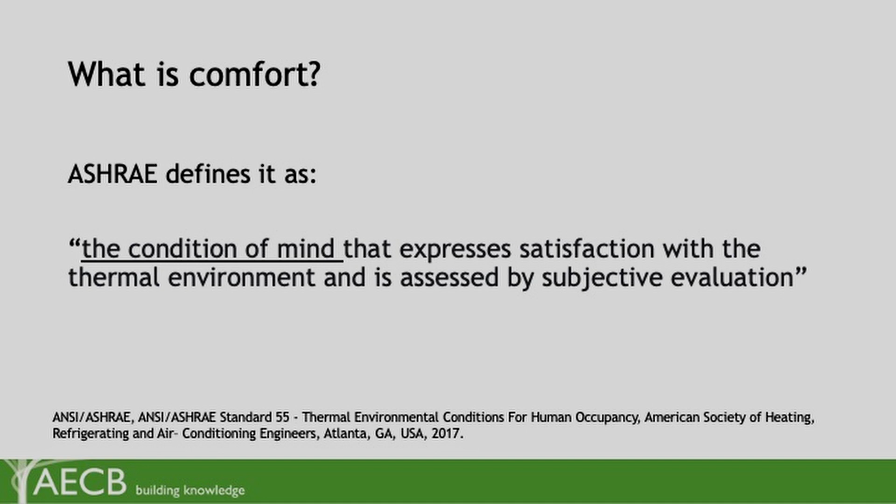So first, what is comfort? The ASHRAE states it's a condition of mind that expresses satisfaction with the thermal environment and is assessed by subjective evaluation. So the first key is a condition of mind, and that's a key part of why defining it is not as simple as people think it is. It's not a number that you can give people, this is what you're going to be comfortable with.

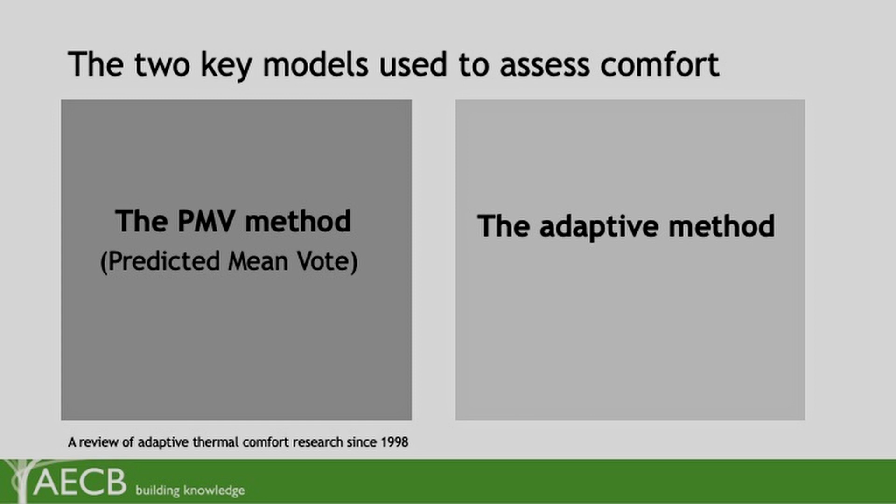There's 2 kinds of schools of thought that look at this, and they both derive into different design techniques, different ways of looking at buildings and mechanical ventilation, mechanical systems. So first is the predicted mean vote method, and then there's the adaptive method.

So the key fundamental difference between the 2 methods is the PMV sees comfort as something physical, something you can measure, something with particular parameters: heat conduction, metabolism, air speed, air temperature, humidity, and then you put it in a formula and you get a number out. They use that using climate chamber studies that were done in the 1970s.

Now, the adaptive method is a more recent method, and it's becoming a bit more adopted, and it considers the human part of it—that there is human adaptation, behavioral adaptation, physiological and psychological. I've highlighted physiological because it's a contentious point. Some people think it's entirely psychological, but no, there are physiological changes that your body makes to make you comfortable in a different temperature.

So in the PMV method, to them, comfort is a very specific range that is defined regardless of what time it is, who you are, what day it is. This is what comfort is.

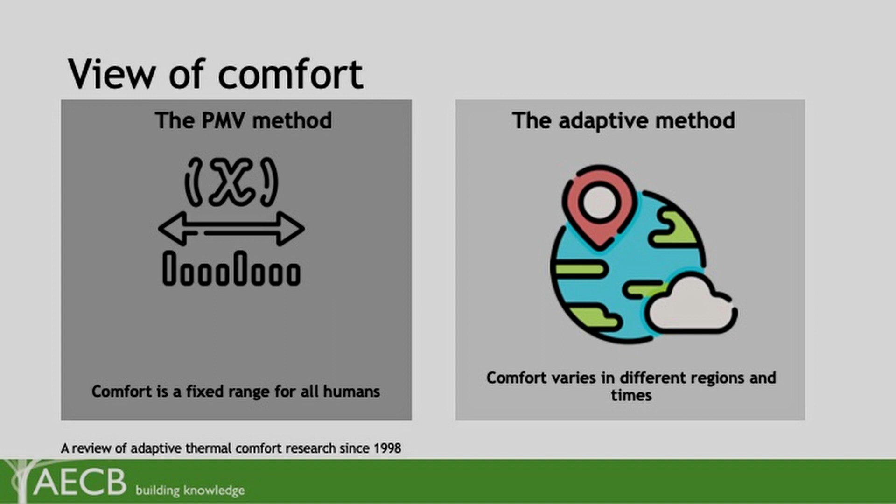With the adaptive method, it perceives comfort as something that is different based on region and time. You, as the same person, might be comfortable at a temperature in summer, but you won't be in winter at that exact same temperature. The same goes for acclimatization—someone in a hot climate will be more comfortable with hotter temperatures than someone who's used to colder climates. There's even evidence of short-term adaptation and long-term adaptation.

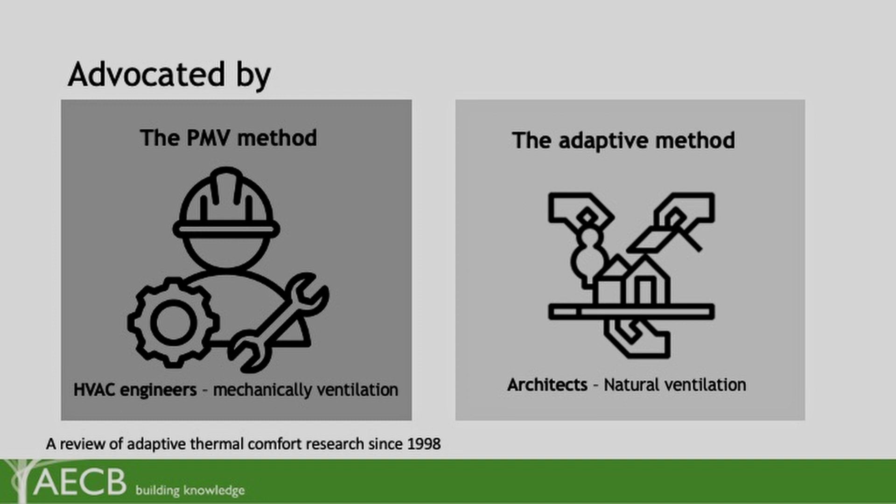So the PMV method is generally advocated by HVAC engineers. Why? Because they have a physics background. They're used to numbers. They want clear, standardized ways for designing and sizing their equipment. Whereas the adaptive method is more advocated by architects who prefer passive solutions, natural ventilation. And when you're dealing with natural ventilation, you're dealing with the elements—something that is not as consistent and stable as it is with the mechanical.

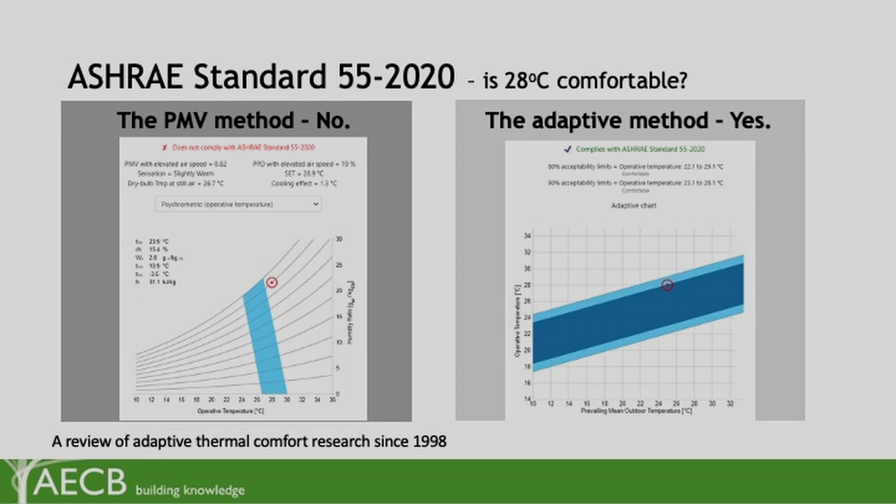So this is the ASHRAE Standard 55, and it's one of the standards that has accepted both methods as valid. I'll give you an example here: at the temperature 28, if you use the PMV method, it will tell you, using all the same parameters, that it's not comfortable. But if you use the adaptive thermal comfort model, it'll tell you yes, it's comfortable, if during that day the mean outdoor temperature was 24, 25. So this is just an example of how different the two can be, and you can see how small that range is compared to how much this range is considered comfortable.

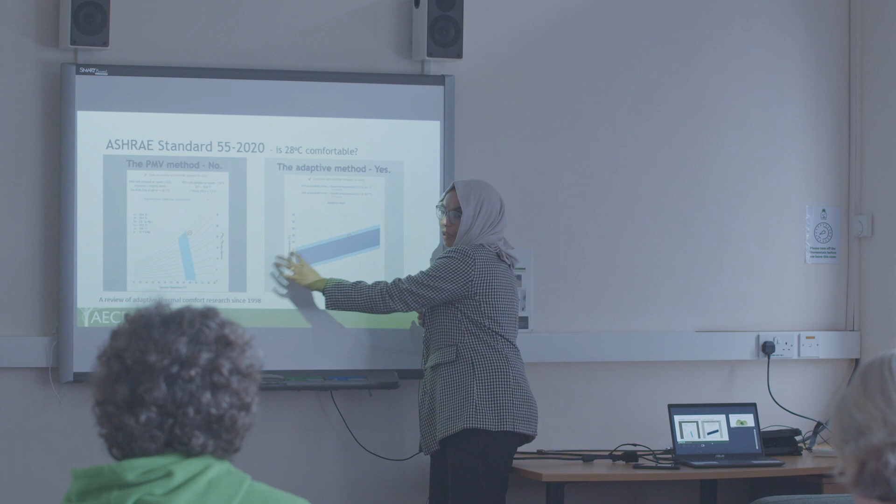So why is this important, and why is it relevant to sustainable buildings? Because you need to build habitable buildings. You can't, for example, put no heating in a building and say, oh, it's saving energy because there's no heating—you have to make them habitable. So that definition is a key part of it, and it has a huge impact.

There was a recent study about something called dynamic set points, where instead of having the same set point the entire year, you just change it based on what temperature it is outside, and it has resulted in massive savings in building energy. So it's a huge part of energy savings.

So we're going to talk a little bit about the case study.

Okay, so Kamran, I should introduce Kamran. He got us involved in this. This is your baby in a way, isn't it? Eco-village in Tanzania, a sort of permaculture-based community project.

We developed a small version of it. It didn't look anything like the final building, but it was a small test unit that took all the features we were hoping to check whether they would work or not. Basically we filled it full of data loggers, had the building used for 12 months and tried to understand did our ideas work? Our ideas were based on precedent.

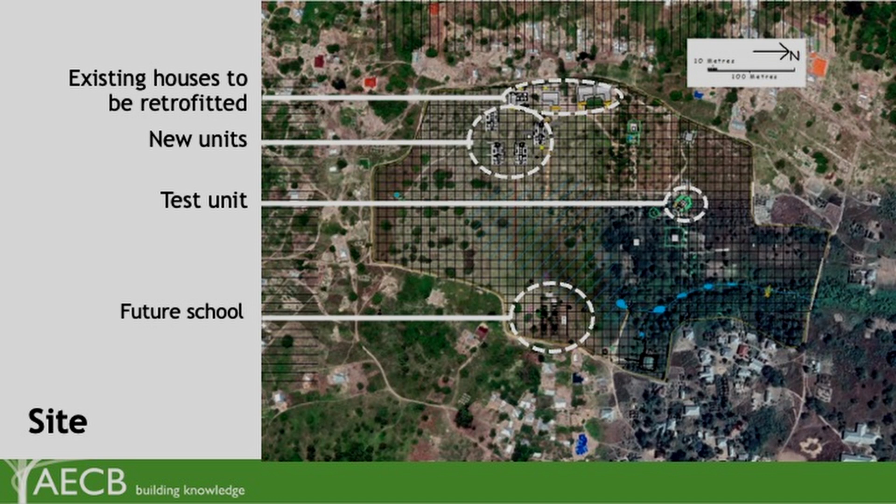It's in a rapidly urbanizing village settlement, towns, but maybe in 20, 30 years that could look very urban, maybe even sooner actually. North is that way. The village has built an eco-school here. The test unit is here. These are the existing houses, and this is where the 5 new houses are destined for. We've just now completed that one.

So back to the test unit. Next slide. And that's to you.

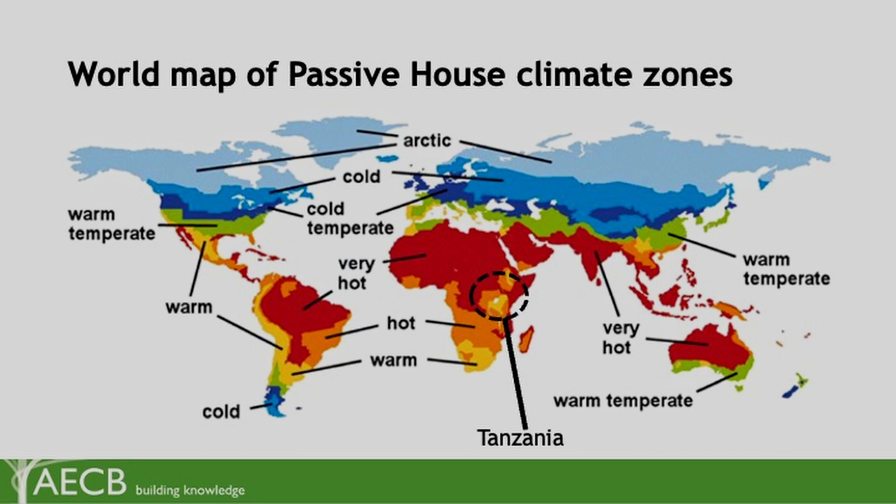In a hot climate context, these are the parameters from the PMV, the parameters that define comfort. In a hot climate, we need to focus on increasing the airspeed, and the reason that helps is it lets you sweat faster and easier. So you become more comfortable in cooling, but it doesn't do anything to the building itself.

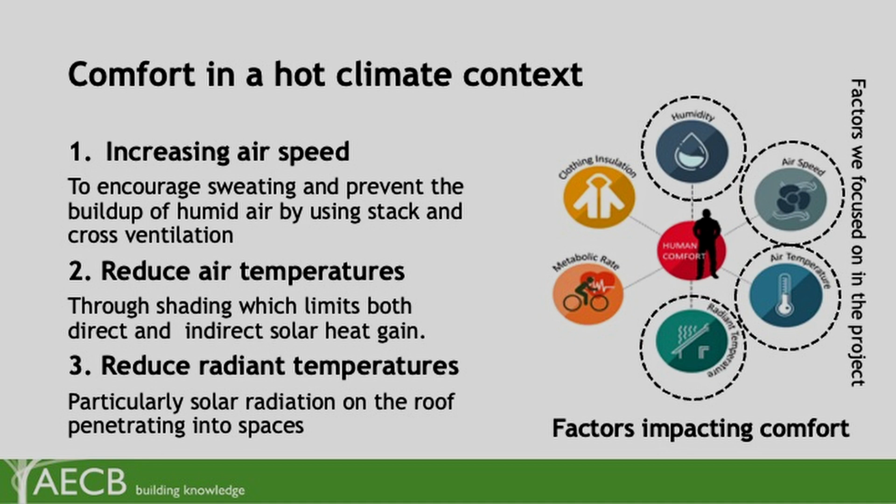Next we have humidity, which is also linked. If we can, as much as possible, let the air flow, because you don't want that humidity to build up, because the higher the humidity, the less comfortable you are at the exact same temperature.

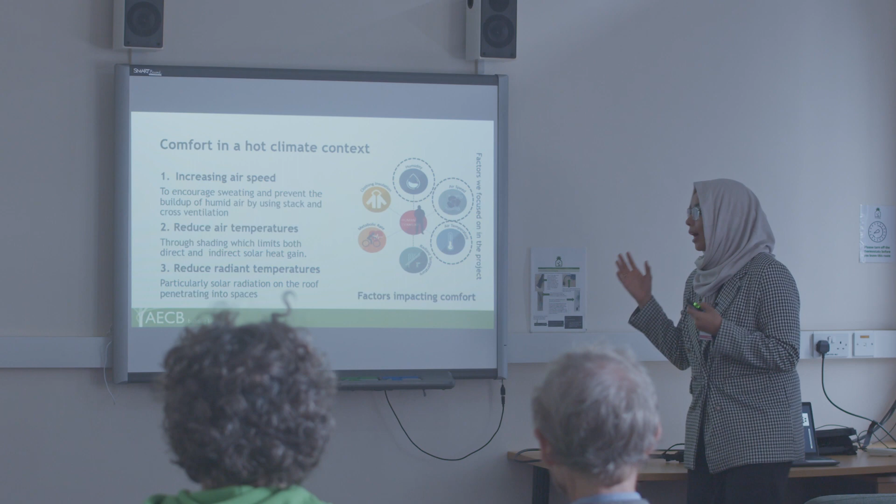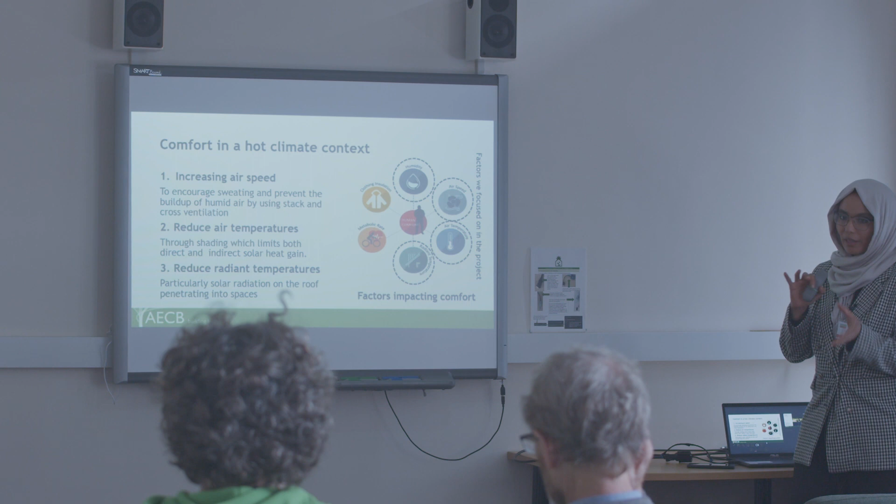We wanted to reduce the air temperatures, mainly by using shading, and we wanted to reduce the radiant temperature. The difference between air and radiant temperature is that air is what's around you, but the radiant temperature is coming directly from the sun. In this tropical environment, it hits the roof in particular, which is what our focus was.

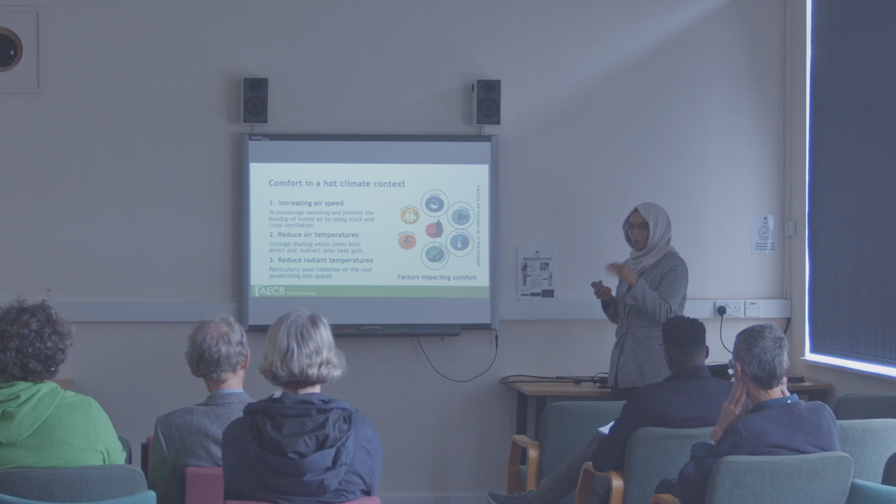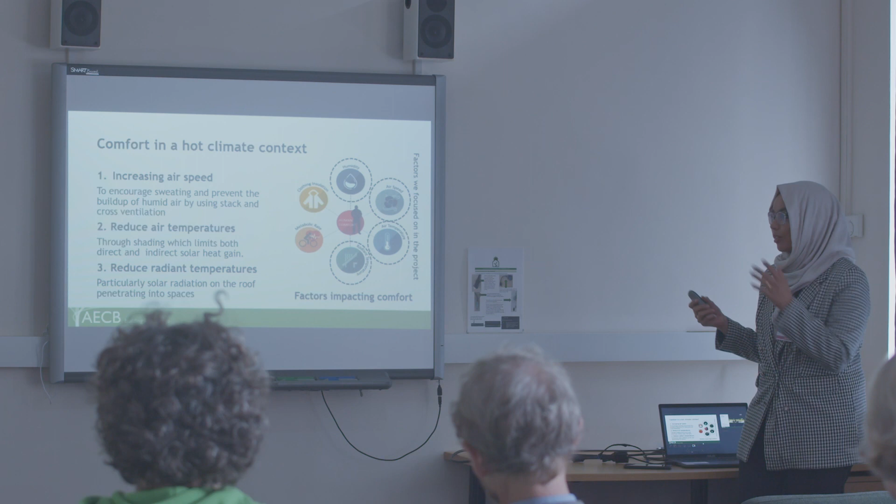You can impact the radiant temperature a lot more than the air temperature, because with radiant temperature, just shading has a huge impact. But with air temperatures it's less of an impact, and you need active cooling, or in a hot climate, evaporative cooling, to actually change the air temperature.

The original concept that me, Adele, and Alan Clarke were discussing was, what are we actually aiming for? We spent a lot of time learning about the eco-village and sitting under this cashew tree, which is the village square. Basically the conditions there were very pleasant. There was access to cooling wind, plenty of shade, and good light. We thought, well, that's actually what we're aiming for. So in a way, that was our technical brief.

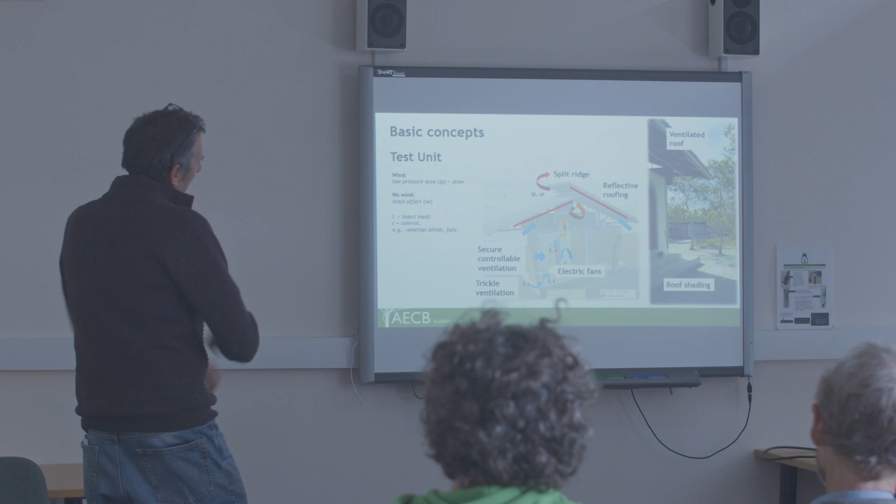Right, okay, so basic concept. The ideas we wanted to apply to the larger house, we packaged down into what we hoped would be a test unit that was also a useful building. Now that had some problems doing that. So basically there were 2 guest bedrooms and a male and female toilet, so basically it's a cube.

The key features we tested were a highly reflective roof, fully ventilated, no soffits, no gables - well, come back to that - and a split ridge. The idea being that we could allow air to move through it, and any hot air would tend to rise up through this and move upwards while fresh air came in there.

So, ventilated roof design. We were aware of the need for cross ventilation across occupants to cool their bodies, just as Huda talked about.

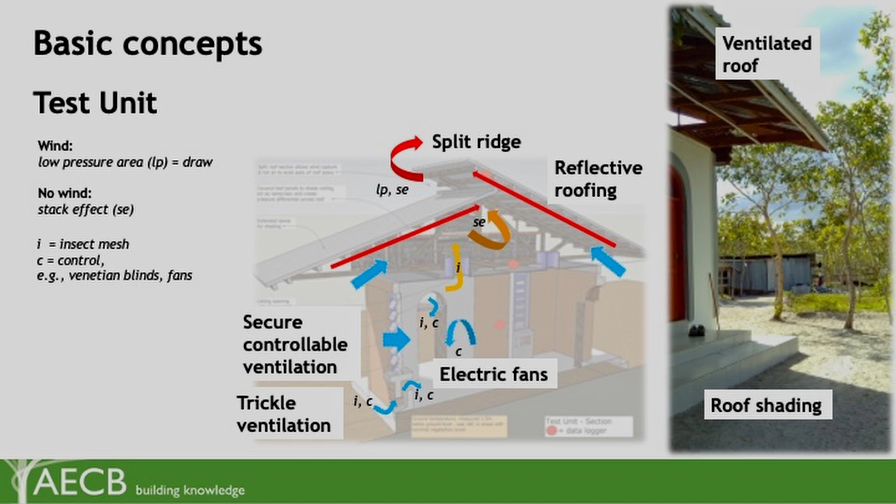So we had basically windows and doors not on opposite sides of the wall of the rooms, which would have been better to test it. So that was a slight compromise because we're trying to make it a useful building.

Everything was insect mesh protected because there's quite a lot of mosquitoes in that area. And then we relied on active cooling through fans, so ceiling fans was another key feature.

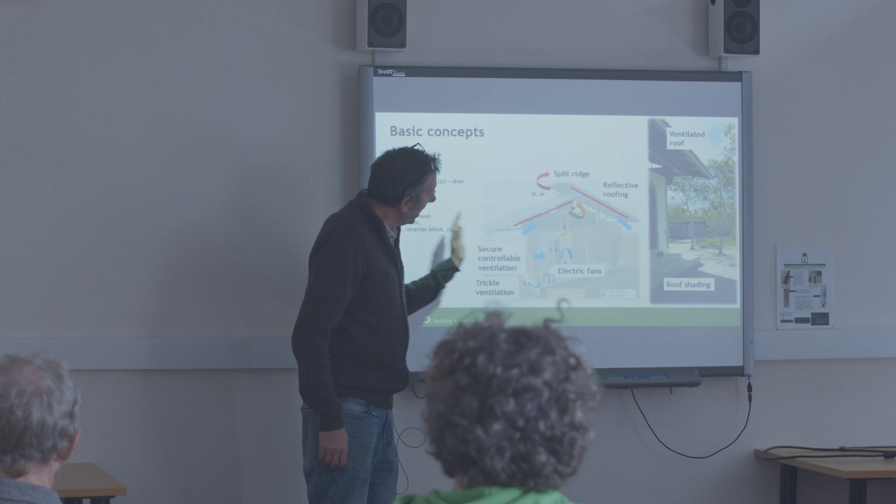In terms of air movement across the room, we had 3 ways of doing it in this original design. We wanted some trickle ventilation that would always be present. This is a ventilated window seat, and we had the main windows and also holes in the ceiling. The idea was that would create a stack effect on still days and would allow, on windier days, air to move across the room, across the occupants and out.

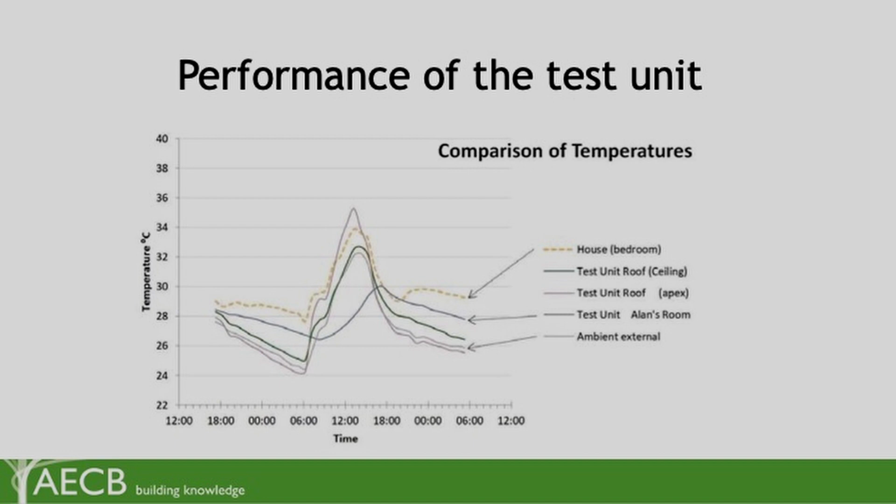That was the result of 12 months data logging. So the results showed - this is the house that they monitored that was already built on the site, and this is the test unit. You can see there is a reduction, particularly in the peak. It went from 34 to 30.

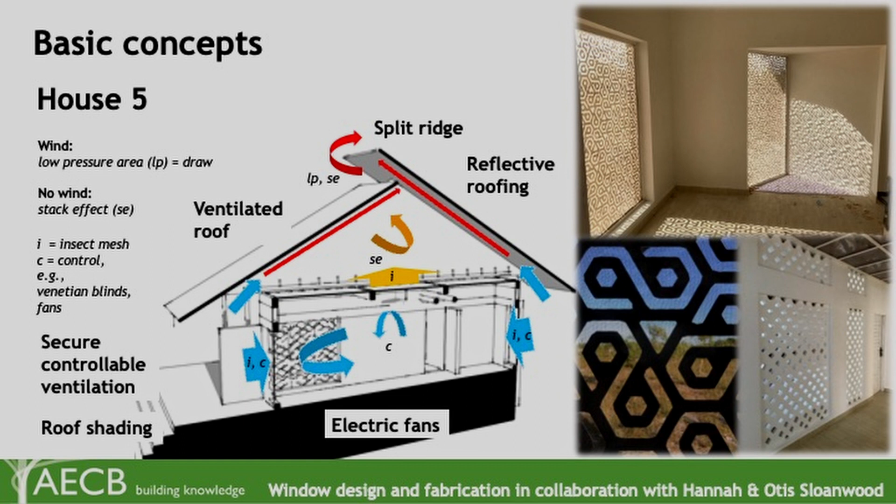We felt that in the new designs they wanted to optimize it a bit more. So this is the main house. They took a lot of those similar concepts, but one thing they did is they first removed the glass in the window so it became completely open, but also in between the walls they've added these ventilated blocks. So now the air could flow through the entire building.

Just to be clear about that glass, the original build test unit was designed not to have glass, but the wooden louver shutters were misinterpreted by the builder to be a standard glass louver system. So it did end up being glass, but they were a louvered system.

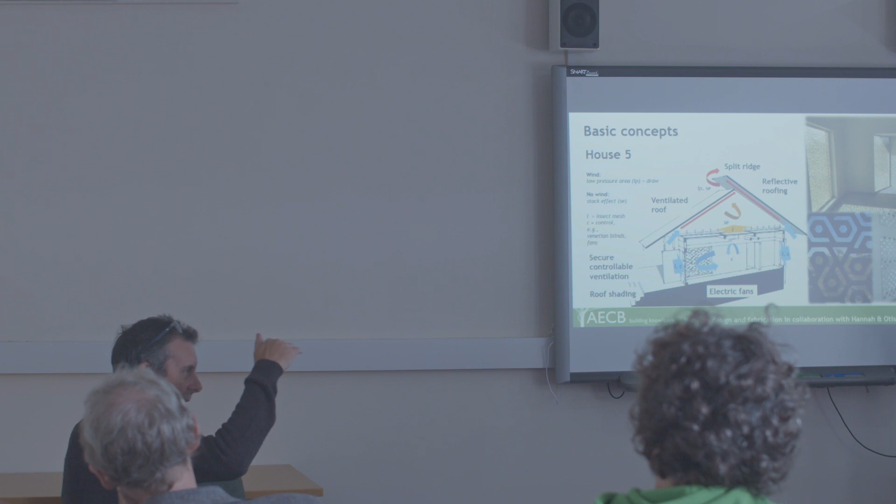Now, why, if it worked pretty well, would we want to improve it more? Because in indoor thermal environments, even just 1 degree of cooling makes a big impact. So any design optimization you could do helps, especially with climate change.

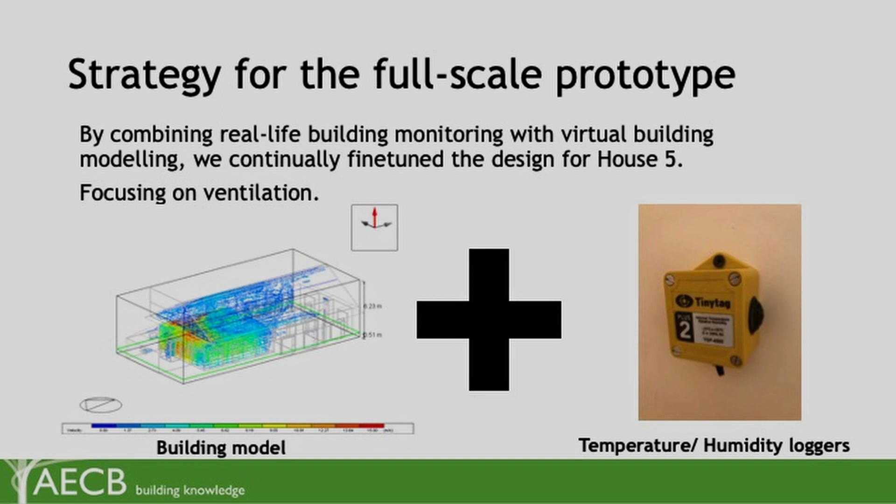So the strategy we took, because the building was already half built, was that we could monitor what was already going on. We also have a CFD model, which is a thermal computer model of the design, and we can see how the airflow works, optimize it, and see how that's working on site. It helps to mesh the two together, because a model is only as good as the data you have. Using real life data really helped optimize and make sure that model is accurate, because what we hope is that we optimize this design so that the other units become based on that optimization.

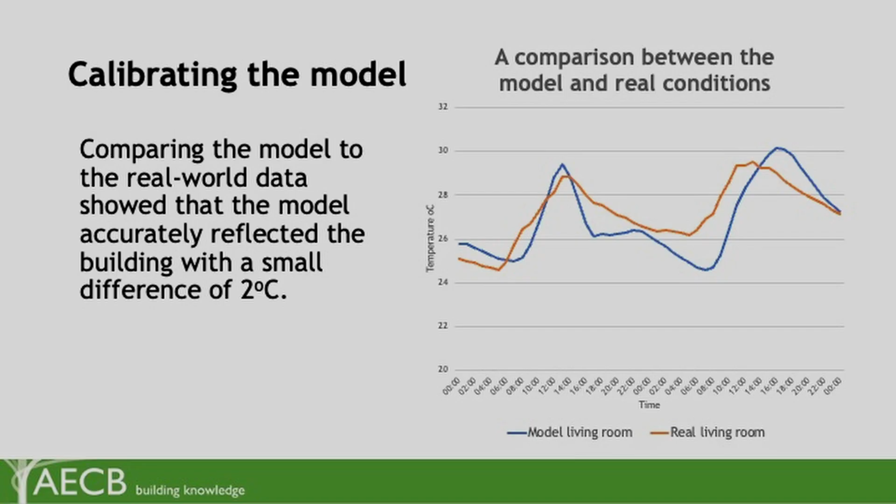So first we need to calibrate that model to make sure that it actually works. As you can see, they very much closely match. It's never going to be an exact match because the weather data in the model is not exact to the actual data happening, but it shows that it very much reflects what's happening.

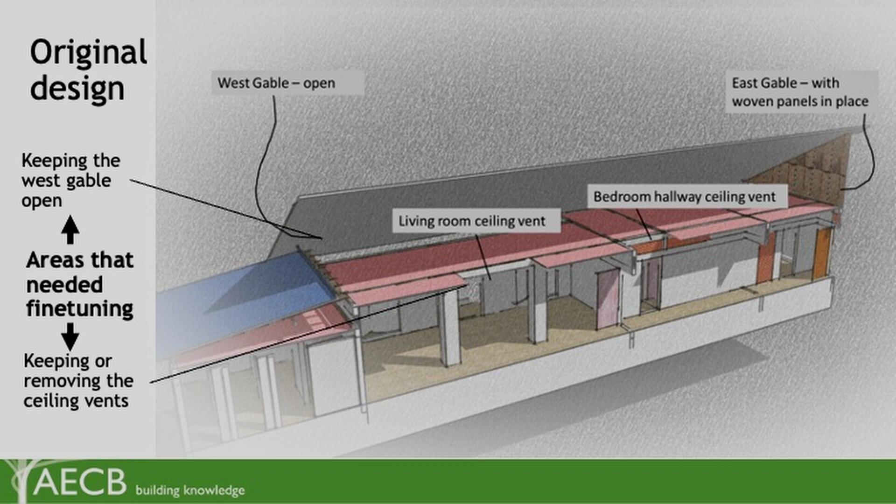So in the initial design of this unit, there's ceiling openings here, and both sides were open. We wanted to make sure that this is actually working. So the 2 questions we wanted to solve were: do we keep both openings, or do we let one closed, or do we keep these ceiling vents open? The first question is ceiling openings - we wanted to make sure they're actually helping, because there's kind of 2 forces at work here.

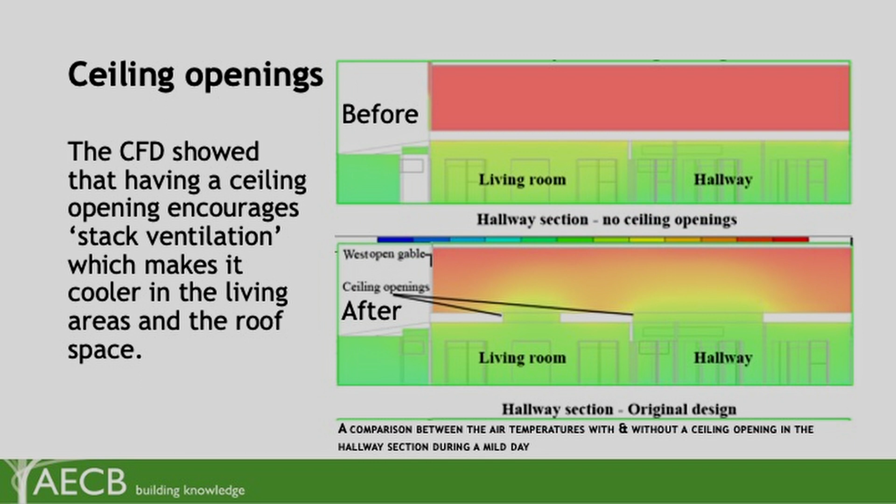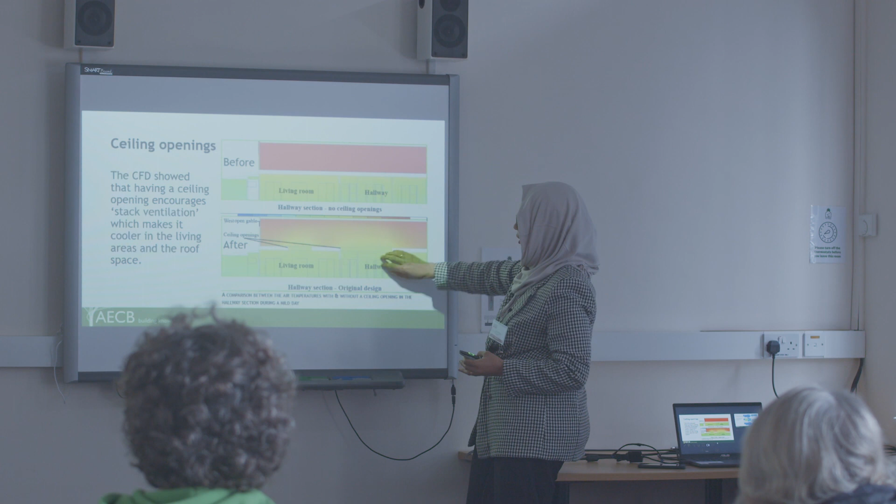That roof is very, very hot, and it's going to heat that space, and that heat might seep into the living space here. But at the same time, once you open it, you can clearly show here that area starts to become less red - that heat is actually escaping up. So we played around until we found a width that really helped, and you can see it also significantly helped with wind flow.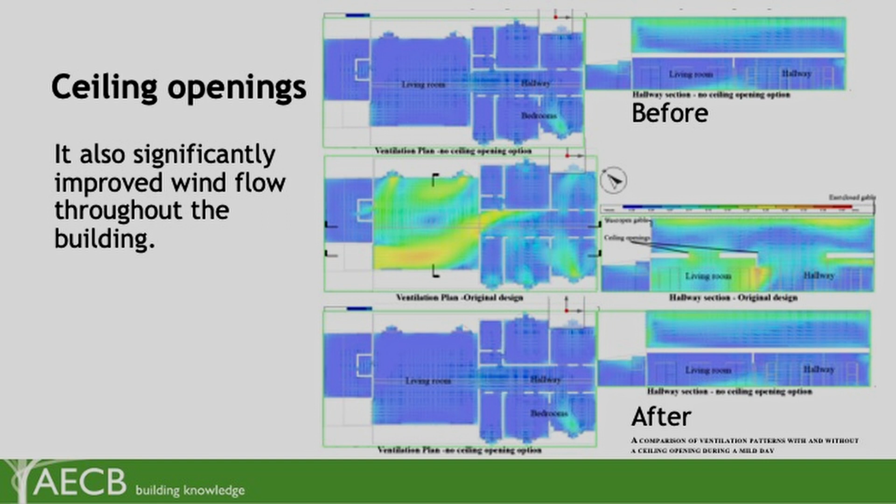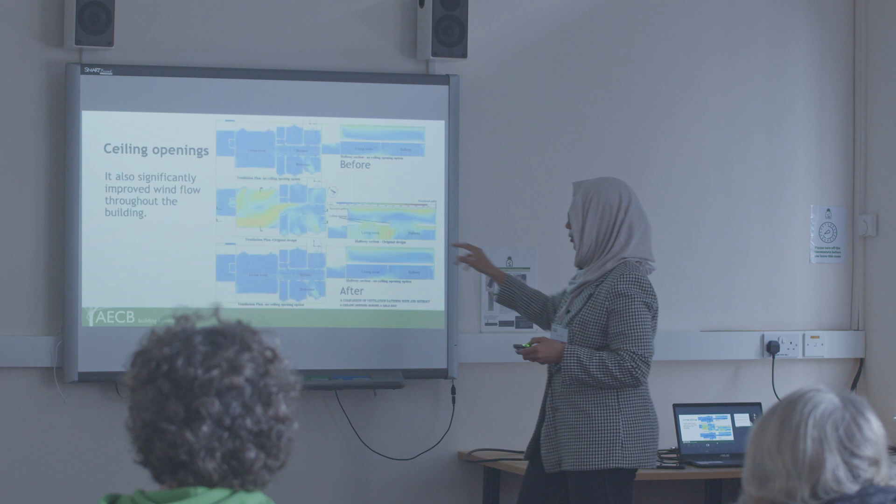So this is the original design that we have, and this is when I closed the openings. You can see there's a lot more wind flowing through once the middle one, where the gables were closed, is closed. You can see the difference here a bit more, opening and closing it. And this is what it looks like in real life.

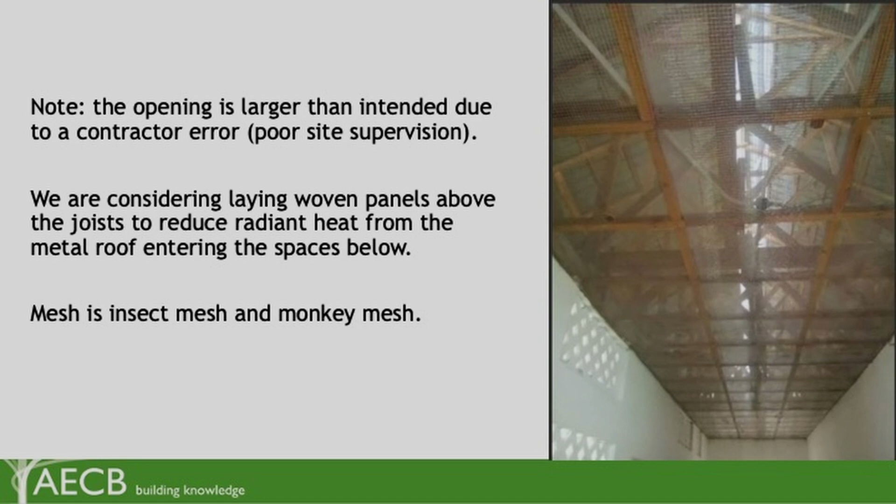In our design, we optimized that it should be closed about till here, but this was a construction error, which is one of the challenges of building in developing countries - communication, and just generally it's really hard to get good quality building. It's something we're going to be discussing in the other workshop.

So this was the second design choice: do we leave this open or do we close it? Because it's a delicate balance between the radiance and the air temperature. Is it letting in too much hot air? Is the air actually going out?

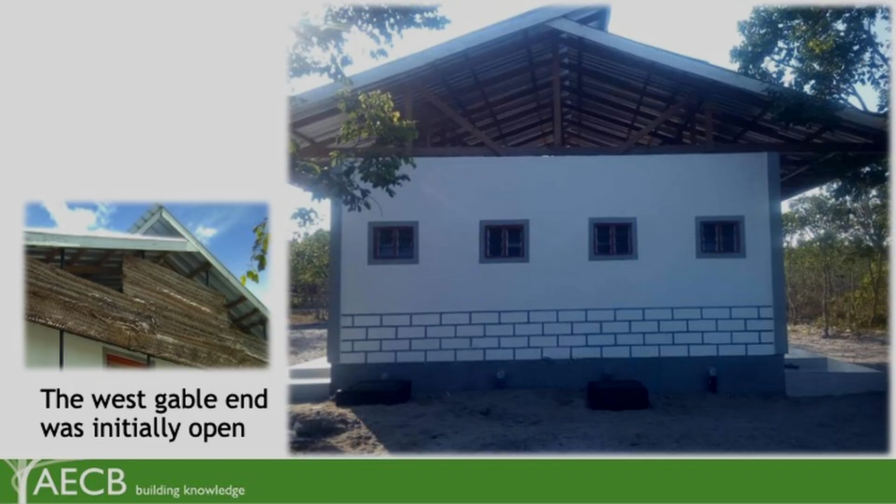One of the practical things about that - going back to that slide - there are two modes: no sun, still humid weather, where we'll be relying on stack effect to help pull air through the windows, past your body, and up and out. And then another mode where there's a strong wind blowing, creating a pressure differential from the front of the house to the back, which sucks air through more powerfully - obviously a good mode. What we weren't sure about was the balance - if wind was blowing through that roof, would it actually come down into the rooms? You've got toilets involved in this as well.

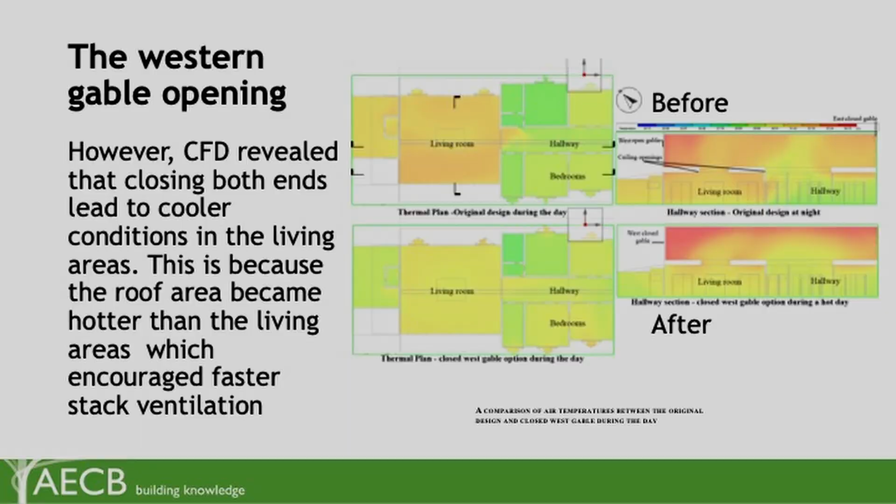So the only way to really answer these questions is using CFD modeling. You can see here I designed it with one side closed, one side open, and here with both closed. You can see the temperatures in the rooms are a lot cooler once those ends are closed. So it shows that those two openings on the side were letting in a lot of hot air. Another interesting thing is once we closed those two sides, because the exit for the air was smaller, it had higher pressure, which actually drove a lot more wind flow through the building. So we chose the decision to close the gable.

Right now, the occupants are going to be moving in, and we're waiting to see their input on the conditions, because we think it's a big part of knowing what they think rather than just relying on numbers.

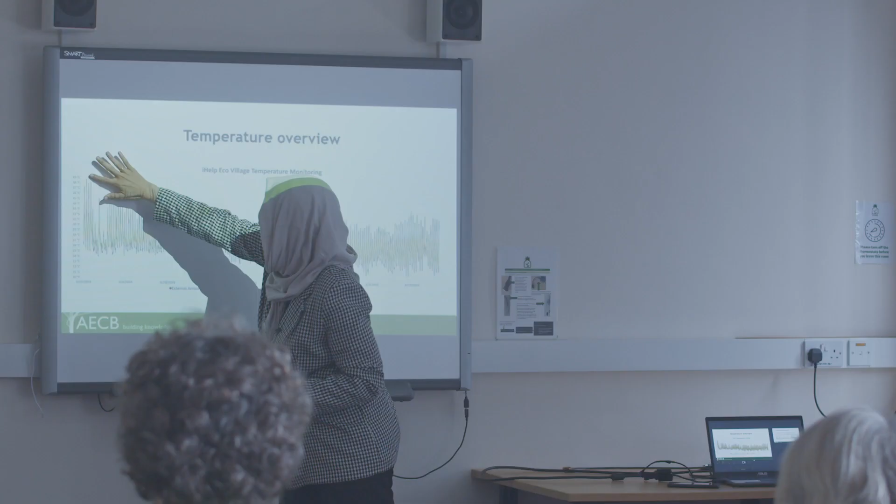So here is the thermal comfort analysis, and we're going to be using four metrics. This is a general overview of the temperatures, which includes the exterior temperatures. You can see they can get as high as 39 degrees, and the coolest it got was 21. It's quite a big range, which you wouldn't really expect in a hot, humid climate - you'd expect a smaller range, but that's the temperatures.

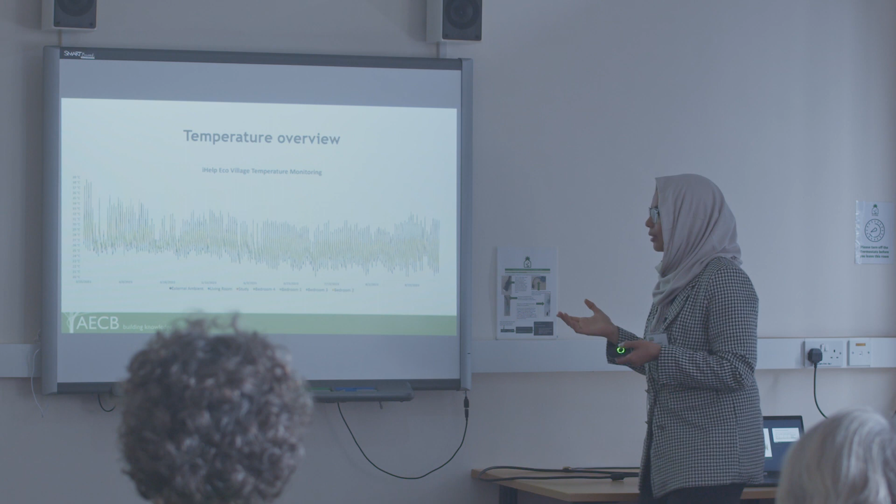There wasn't much access to nighttime cooling. What this graph is also showing is generally whether the rooms are ever hotter than outside, or significantly cooler, and whether they maximise cooling at the lower nighttime temperatures. The first test unit had too much thermal mass, and it was holding onto the heat too far into the night, which made going to bed uncomfortable. So we reduced thermal mass through a variety of design measures - one reason the windows got bigger - cutting out thermal mass so we reduced that heat retention into the night. That design decision has worked, and you can see the ventilated reflective roof does keep room temperatures significantly lower than external ambient.

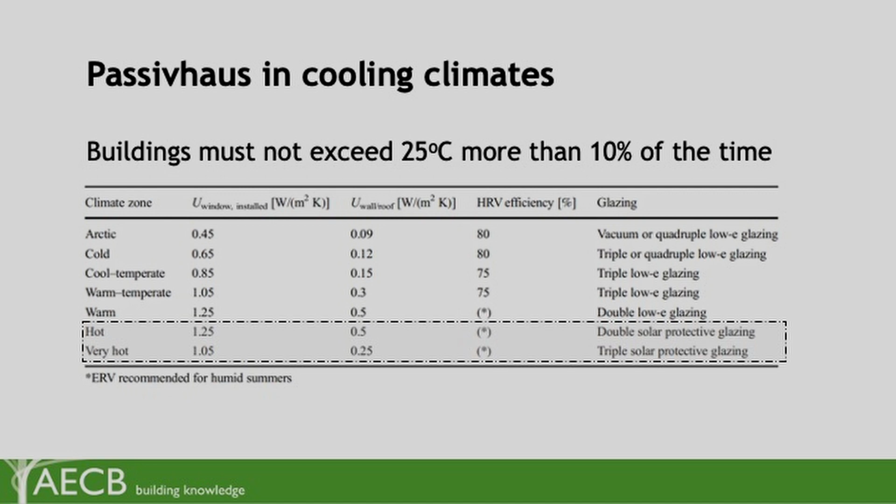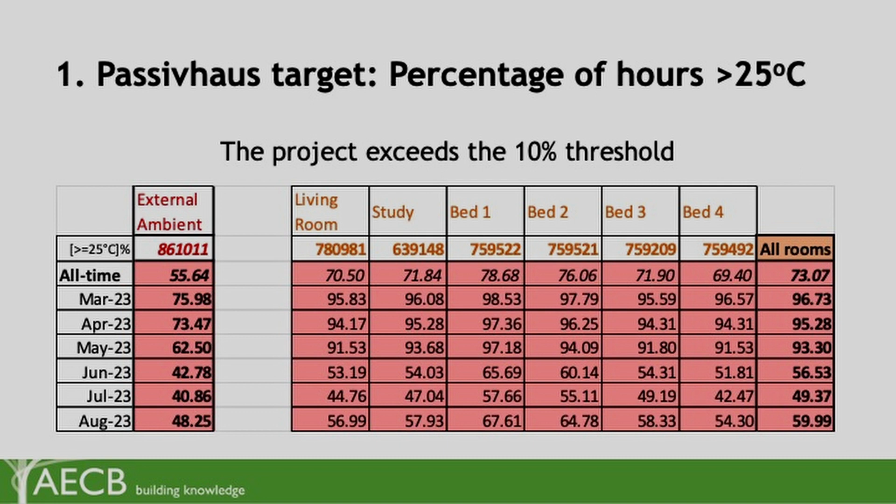Our first measure that we measured against was Passivhaus. Passivhaus says the temperature must not exceed 25 degrees more than 10% of the time, and it gives basic recommendations for U values and glazing types for very hot and hot climates. That target was not met - in most of these rooms we exceeded that 10% threshold, mostly because the external ambient temperature also usually exceeds that threshold, and because we're not using any air conditioning or active cooling.

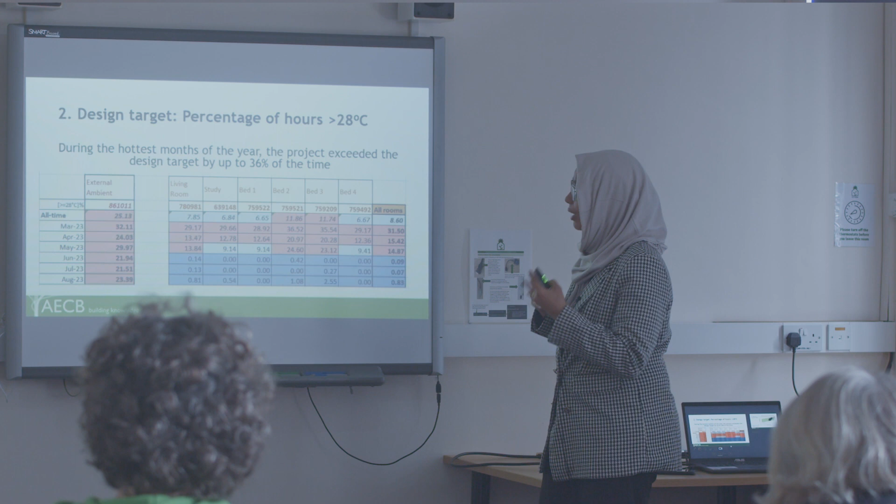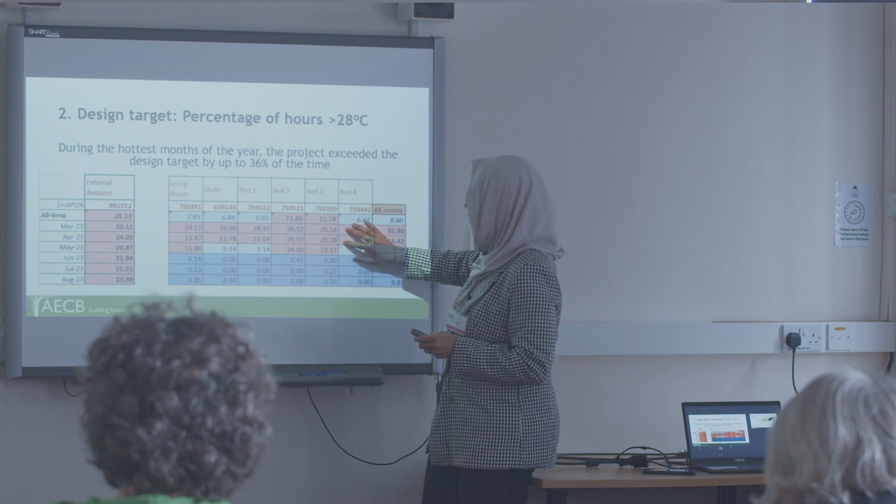So does this mean the building is uncomfortable? Let's measure other metrics. The first metric is our own design target - we wanted to reduce the percentage of hours above 28 degrees, which was just a starting point, a number that's relatively comfortable. For the cooler months, we didn't exceed that, but for March and April, the hottest months, our highest exceedance was 36% in the second bedroom. So it's a massive reduction from our previous design.

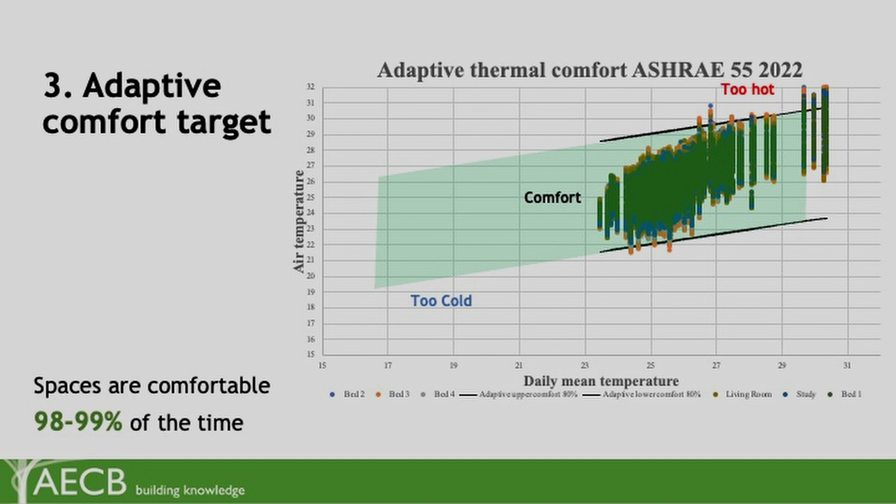Let's go back to the adaptive thermal comfort. It asks you, are you comfortable at this temperature based on what is the temperature outside? Because it assumes you have contact with the outdoors, that you're not in a sealed environment, that you go outside, and especially in our case, because they are exposed to the outdoor temperatures.

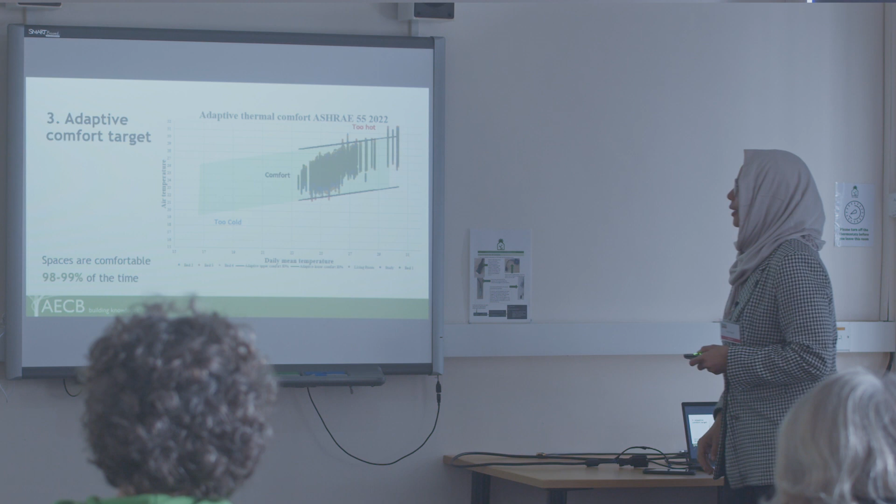As you can see, most of our temperatures are actually within that comfortable zone - 98 to 99% comfortable. Now, if we try the more stringent PMV target, you can see that for 77 to 85% of the time, we meet that target.

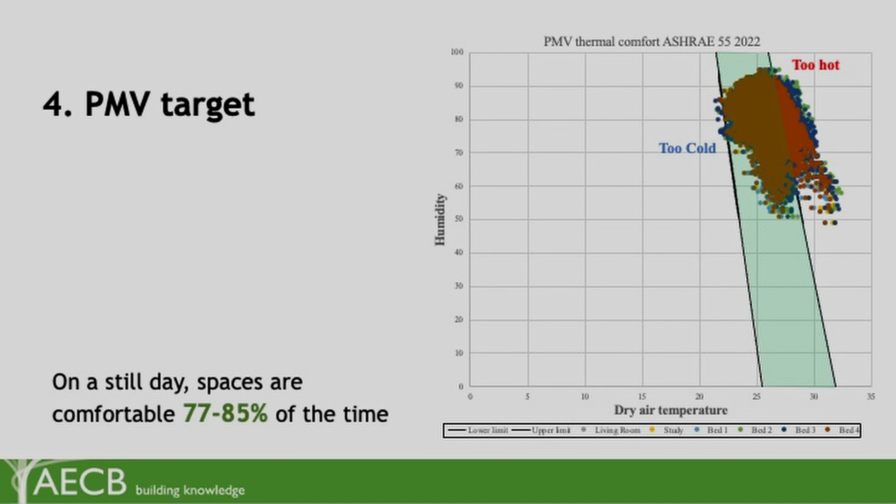And this is assuming that the airspeed is 0. So we wanted to test it during still conditions and during windy conditions. And you can see here, there's a bit here that is too hot.

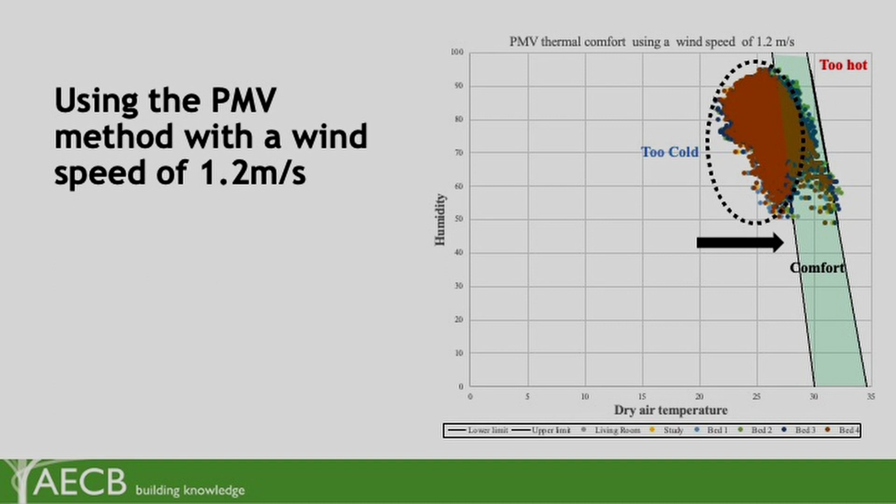So what we wanted to see, well, what if the wind speed was 1.2 meters per second? And you can see that shifts the comfort zone towards here, so that part becomes covered in comfort. But at the same time, that makes these temperatures too cold. So that means if it's really, really windy and the temperature is not high enough, you will feel cold.

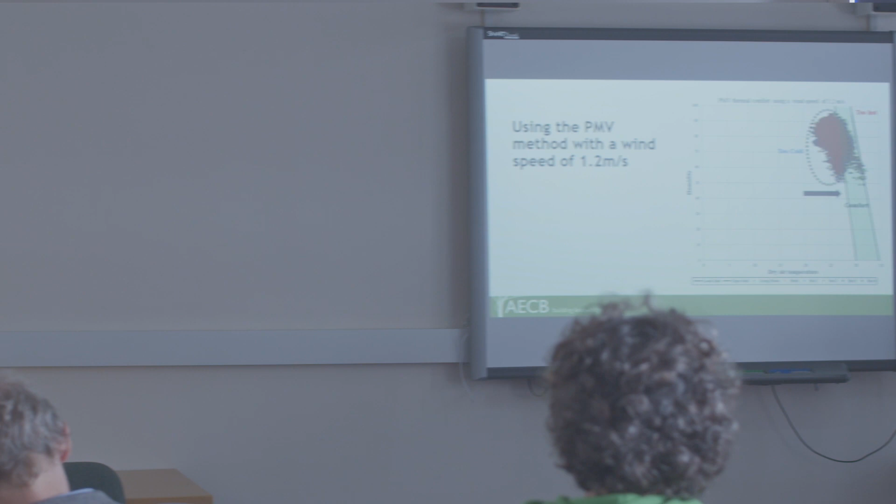So what we believe when is you say you mean people who are adapted, physiologically adapted to that climate. Yes, exactly. Not people like me. Yeah, that was really comfortable - because 25 degrees would not be considered cold here, I guess, in any context.

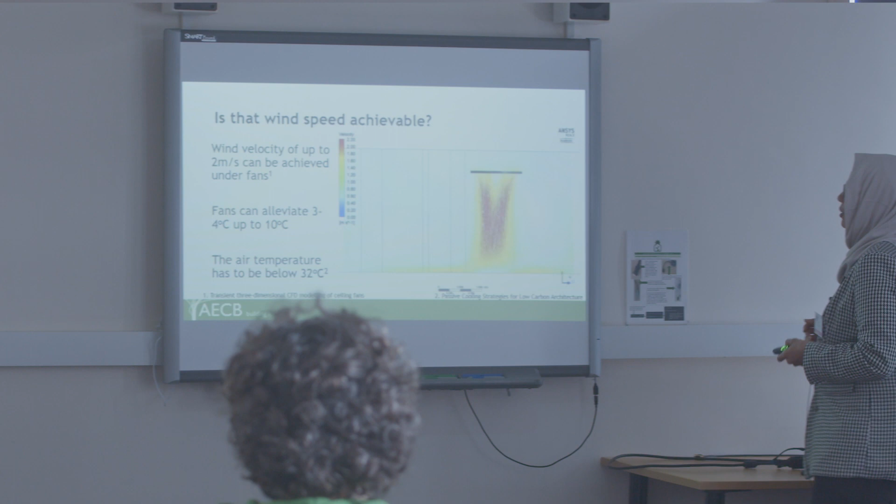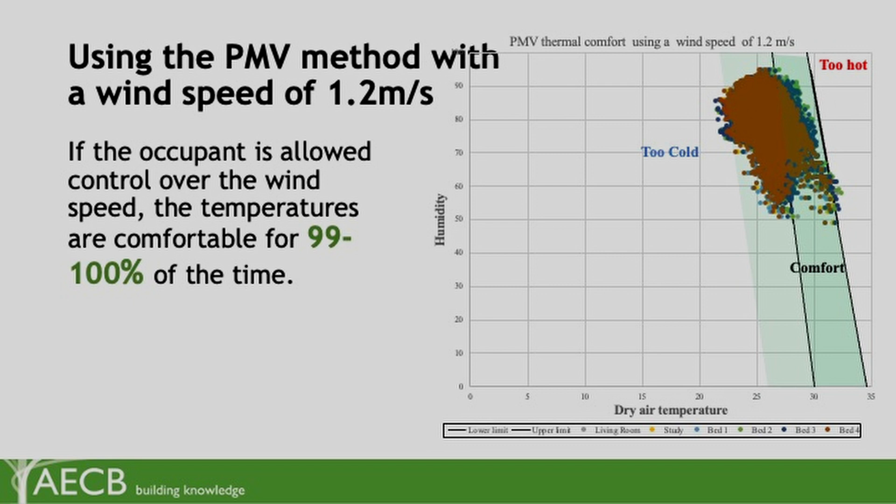But so what we believe is that, if we give the occupant control over that wind speed, we can use both of them, we can expand it. But that means that the occupant has to be able, when it's very windy, to close the shutters, close that draft. And when it's not windy, for example, that they can use a fan.

Just elaborate on that control of the window airflows. So the best solution, they're not fitted yet, was Venetian blinds. If we do that, the comfort reaches 99 to 100% of the time, just by changing the wind speed. That's all we have to change.

So can that be achieved by fans? I looked at a few studies, and you can see fans can reach up to 2 meters per second with the wind speed. But the problem is, look at how they project - you have to be directly under the fan to get that 2 meters. Just in this area, it's 0.4. So that is one of the limitations of fans, and that's why it's really key to design the fans to be where the occupants are.

But there are two aspects here, right? One is in the communal areas, in the living areas, you may not be under a fan, but in a bedroom, the fan is placed over your bed, so actually it's quite small.

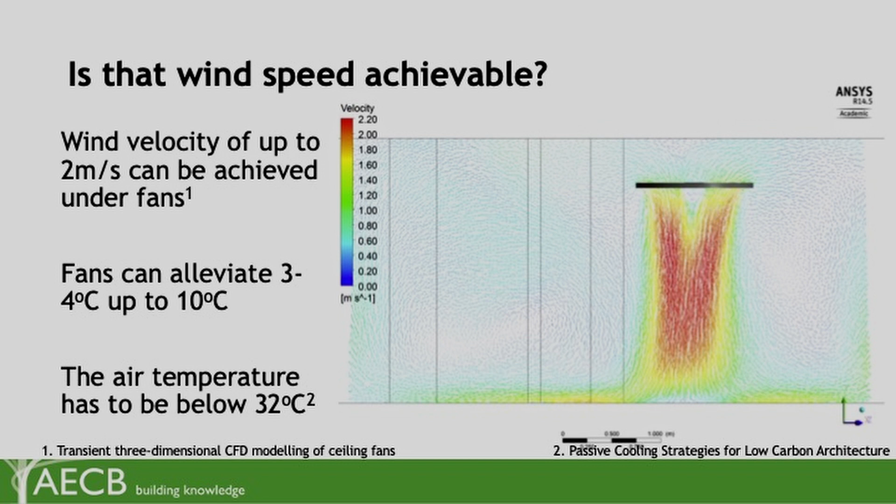And fans can alleviate 3 to 4 degrees, which is mostly agreed on, but some studies go up to 10 degrees of how much they alleviate. But this is a key part, that the temperature has to be below 32 degrees. Why 32? 32 is the temperature of your skin. If the air that you're blowing through someone is 33 degrees, you won't get that benefit of helping sweating, because that air is hotter than the person themselves.

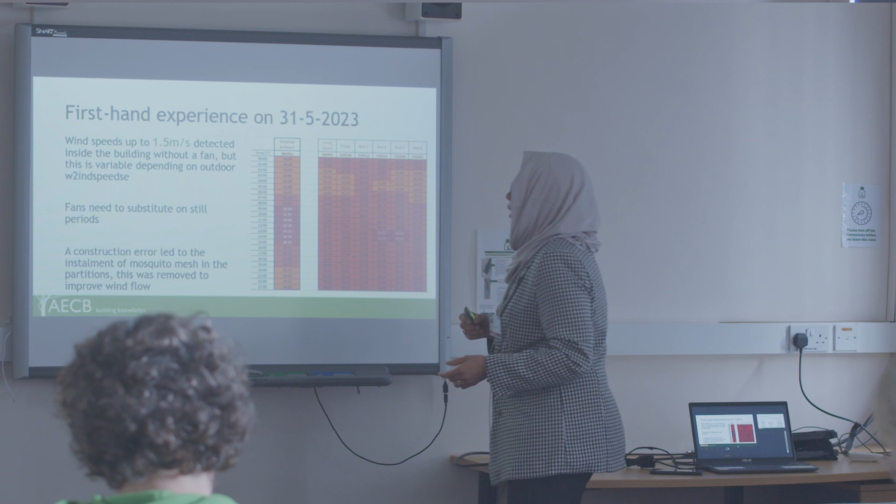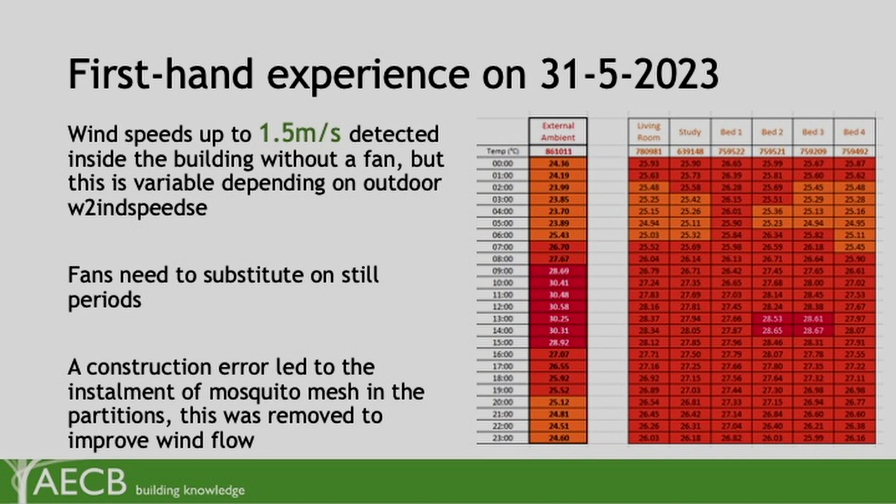So Andy is going to talk a bit about his experience on a particular day. So we were over there, me and Kamran were over there on a particular day in May, and I decided to spend the night in order to personally experience it and try to calibrate the measurements against my own experience.

We had an anemometer, where I was also trying to capture wind speeds outside and wind speeds inside, which was basically ridiculous because I had to take a reading outside and run in, by which time the gust had gone, so it wasn't very effective. But I started to get a sense of what a particular breeze in the building felt like, and I could take a reading. So what was a comfortable breeze from outside coming through the building was about 1.5, was a nice gust that came through the building. Quite often it was 0, and that was when it became very still.

So it's quite a good bit of weather to test. I found it was uncomfortable outside, but adequately comfortable inside on this particular day. I had a good night's sleep. I had the fan on for a short period, but I found I could turn it off about midnight. That sort of personal experience with the data and the modelling was invaluable. I would like to go and spend longer over there on that basis, to get a really deep understanding of what we're doing.

We oriented the building for maximum shading, so it was east-west, with the narrow elevations facing east-west. The predominant wind direction was from the east, which I think is probably less important actually, but we were thinking about that. The main thing was that most of the elevations did not get sun because of the overshading roof. The east elevation did get sun, and we were going to shade that elevation. At the moment we haven't done that, and I think we're noticing it impacts those end bedrooms because of the heating of the brickwork, even though it's painted white.

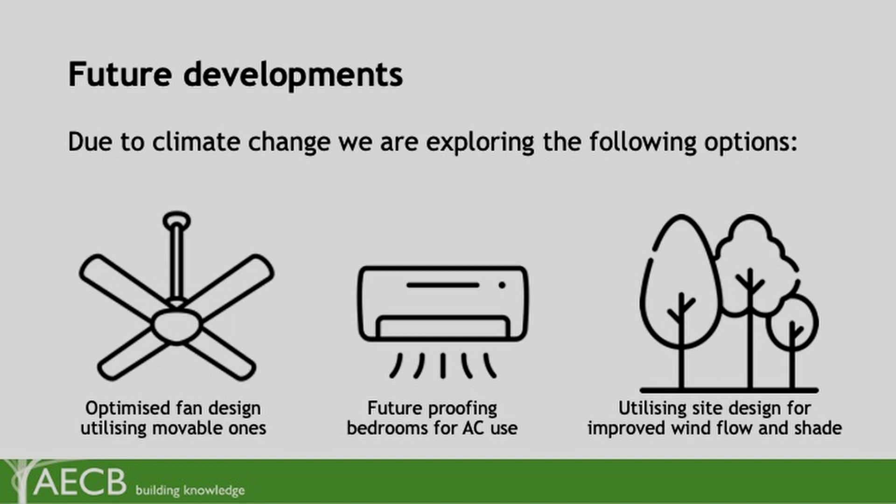But with that in mind, we're looking at future-proofing the designs for the bedrooms by adding air conditioners there. Why? Because climate change is happening, temperatures are getting higher, and as I mentioned earlier, with economic development people do install air conditioners. If you don't plan for it, they're going to do it without planning - just install it. This building relies entirely on natural ventilation. If you just install that air conditioner, they're going to think 'we need to close up all these openings,' and once they do that, the building will only function as an air-conditioned building - you've lost that natural feature. So what we're trying to do is find a smart way to incorporate the air conditioner so they can use it when they need it, when it's really hot, but also use natural ventilation when temperatures are milder. So it's marrying the two, making sure they have access to both.

We also want to look at utilizing site design for improved wind flow and shade, using what we have in the surrounding area. It's worth elaborating on that, because the test unit was in a more wooded area, and it is cooler there - cooler in those treed areas. This site was very open, not even ground vegetation, mainly sand. We have one data logger I remember in that wooded area, so we'll be able to compare last year's temperature versus ambient temperatures, to get a sense of how exposed it was.

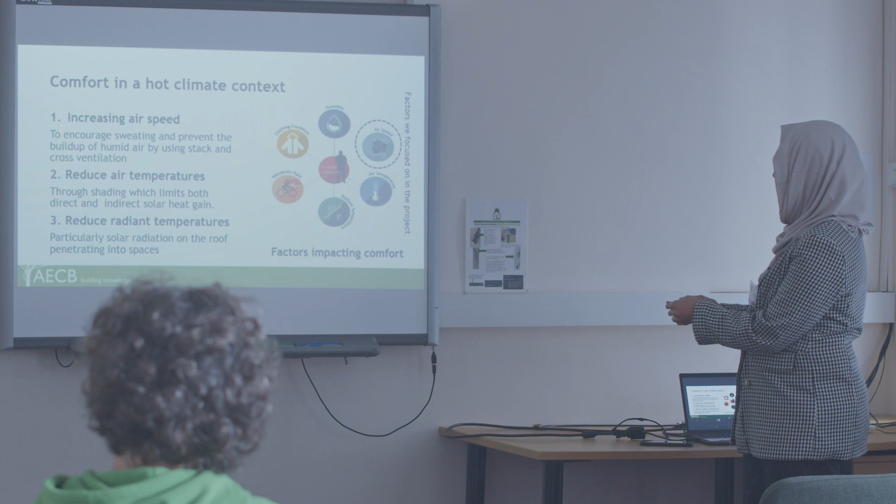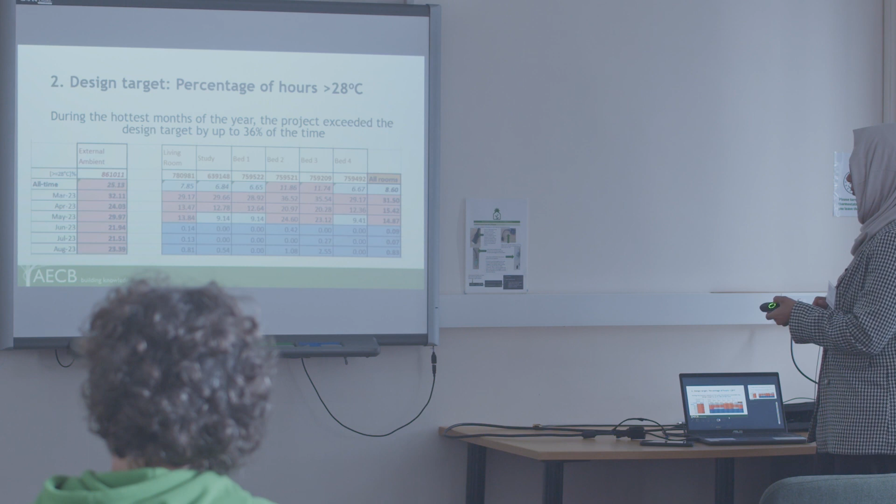And what we're hoping is that these will become rules of thumb, so that we can apply simplified design codes that might allow this type of approach to be applied to somebody's house, locally.